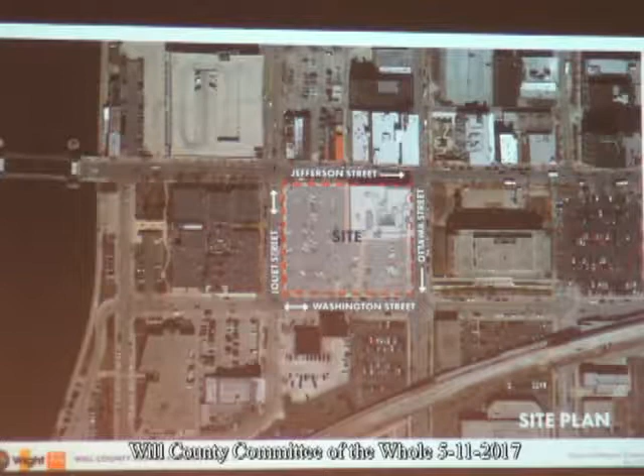So first, I think everybody knows the location. The county acquired the First Midwest Bank site several years ago now, and that's the site for the new Justice Center directly west of the current courthouse, the block highlighted there. And the project is intended to consume the entire block.

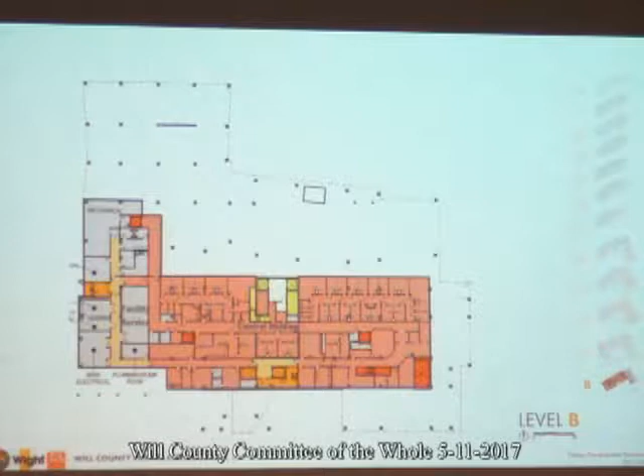I'm going to run through floor by floor to give you a feel for what's in there, the major overriding parameters. The project, as it's planned right now, is going to have 28 courtrooms in the initial build-out, and we'll talk a little bit more about this option of shelf floors. But the building has the potential to have 38 courtrooms total. The building is just under 370,000 square feet total, 10 stories with a penthouse for mechanical.

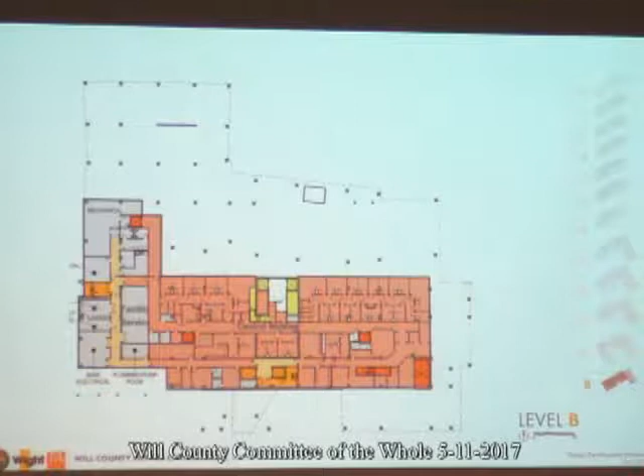The basement of the building is planned for the central holding functions. Folks that are brought over from the jail are held in central holding and then distributed to the upper floors for court. Also in the lower level, we've got some building support functions, mechanical spaces, and so forth.

On the first floor, this is one of those spaces where everybody was jockeying for position. The biggest components are obviously our security queuing. That's been a major component of the design discussions throughout the entire process. One of the significant challenges of the current courthouse has been the ability to process people quickly through security and have adequate space for people to queue and wait. So that's been a big focus. That's this area right here. We're focusing a lot of area for security queuing and security screening.

Also on the first floor, we're trying to accommodate most of our higher volume functions. So the traffic court on the first floor, that's a high volume courtroom. We have the circuit clerk's customer service functions. Oftentimes people will come in and just take care of business with the clerk and then leave, so we want that to be easy for folks coming and going from the building.

And then jury commission, jury assembly. That's another area that right now is challenging in the current courthouse. These are people that are donating their time to be part of the jury, so we're trying to make that a little bit nicer space. Because it's not utilized all the time for jurors, we're trying to make it multi-purpose so it can be used for additional meeting space to get the best value out of every square foot of the building.

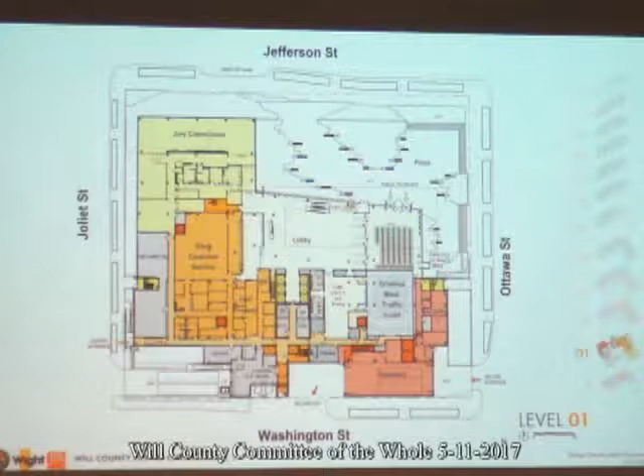The backside of the building along Washington has a lot of the service components, so that's where the sally port is for prisoner transport, loading docks, trash, all those kinds of things are oriented toward the south face of the building. And then we have a secured plaza at the front to make a nicer entry for folks coming to the building.

Second floor, again, we're looking at higher volume, higher used spaces. To get the vertical throughput in the building, we have elevators, but we also have escalators to the second and third floor to move people more efficiently, so you don't have those bottlenecks on the first floor. Two higher volume courts here, a criminal misdemeanor court and a small claims court. Both have a lot of people in them every day.

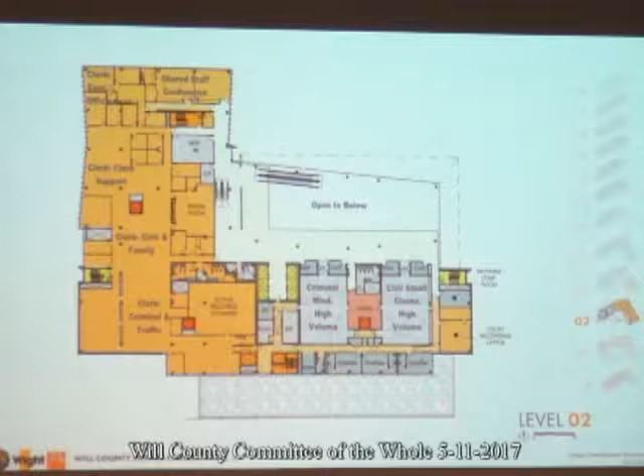And then the balance of the clerk space is on the second floor. There's a connection between the first floor customer service functions of the clerk and the back office functions, all the minute clerks and supportive functions, on the second floor, so they've got a direct connection of their staff for efficiency. And then you start to see supportive things, chambers, court reporters and other functions that make up the back wing of the building there.

As we get to the third floor, the main tower part of the building, the 10-story part, becomes more consistent in terms of the floor plan. We have 4 courts on this floor, and this wing we have been referring to as the agency wing. This tends to be much more office-oriented, so we have some satellite space for adult probation, law library space, and some satellite state's attorney space.

A lot of you will recall that in master planning we looked at options to consolidate every court function in the building, but it became too large a building. So state's attorney, public defender, and probation still reside with their primary offices in other buildings, but we accommodated a staging or touchdown space for them, so that if they are done with court and need to take care of a little business, rather than the state's attorney walking back to the EMCO building, they can do it quickly without leaving the building.

One of the other major things in the design: right now, in the current courthouse, there's not a good separation between the public, private staff areas. That was made better in recent years. And then detention, or the secure detainee movement, custodies. That is difficult right now. That happens kind of through the back judges' corridors, which is not an ideal scenario.

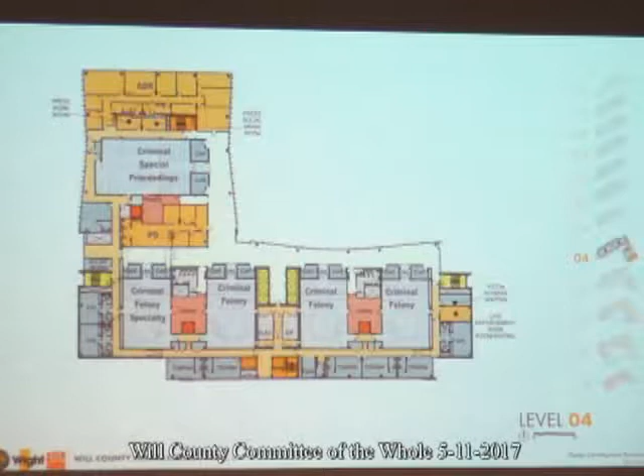Okay, so moving up to the 4th floor, we have again 4 courts planned here. A lot of the back corridor functions are judges' chambers and other supportive functions, and then we have jury spaces on the wings here. The idea with moving them out to the wings is, again, we're trying to get the best use out of every square foot of the building. So if a jury's not in session, then those spaces can be flexed to be used for other types of meetings. We have a secured point here and then another one back here, so that you can bring public in there to do a different type of function. So those are all the details we've been working out with the judges and sheriff's officers to work out the logistics on it.

This court here is one of the specialty courts, criminal special proceedings court. So that's a larger court. That would be where you'd have some of your more significant trials and so forth, where you need more people, more counsel. The standard courtrooms are approximately 1,700 square feet. A lot of that is dictated by Illinois court standards and the accommodations that are needed in the well of the courtroom, the litigation area, and then providing a little bit more seating area so you don't have so many people waiting in the hallway for trials and cases. We also have a public defender satellite office, and then the alternative dispute resolution, which is currently in the EMCO building, is moving over to this building as well.

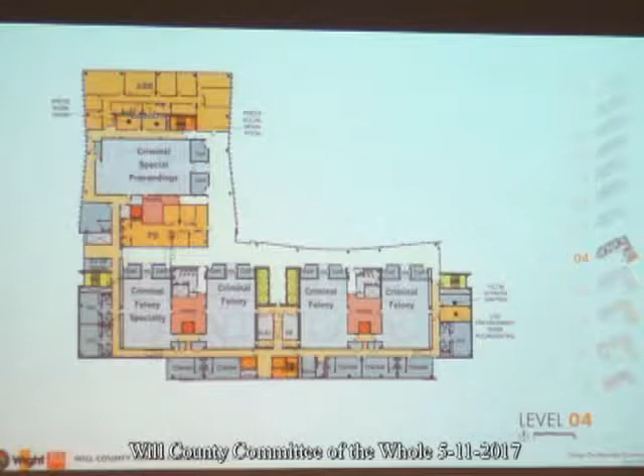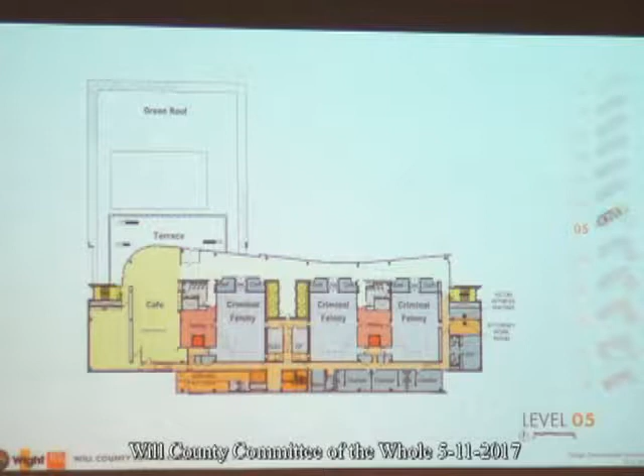6 and 7, we did a slight shift. Originally, we were looking at the project of having 24 courts in the initial build out, and going up to 34 courts, and that was staying consistent with 4 courts per floor. However, there was always a desire to try to maximize the number of courtrooms in the building and get the best efficiency out of it. So we did a lot of study with the judges and other participants, and we were able to accommodate on 6 and 7, 5 courts per floor.

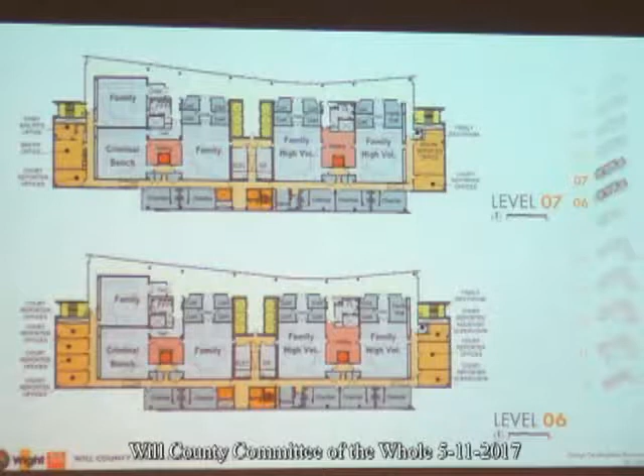So within the same total square footage of the building, we're able to get additional courtrooms, 2 more at the initial build out, and then as many as 4 total additional courtrooms if you go down to shelled court. So these are a lot of family courts on the floor, and then we've created a little bit different court, like a bench trial court, which doesn't require as much space. And that's kind of one of the strategies we use to maximize the footprint.

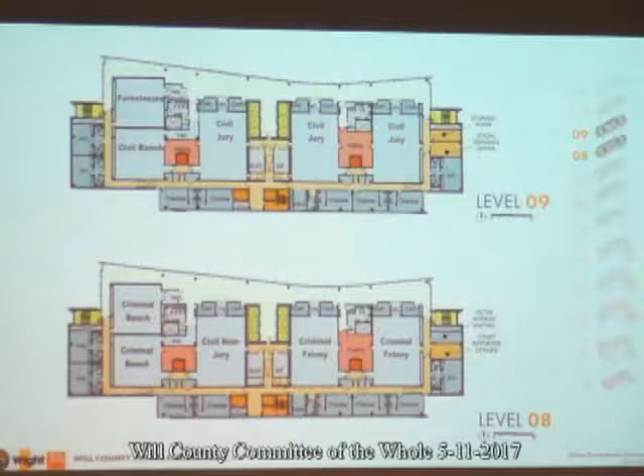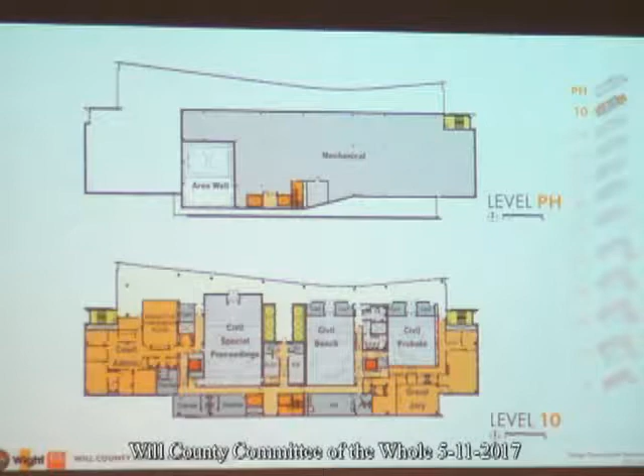The 10th floor, we have one more special proceedings court, so this would be a civil special proceedings court, again, the higher volume court cases. The court administrative areas are up here on the 10th floor, and then we have a couple other more specialty type courts, and then grand jury is also in this area. So grand jury is currently over at the EMCO building, will be moving to this building as well. And then penthouse is most of the mechanical systems and so forth for the building.

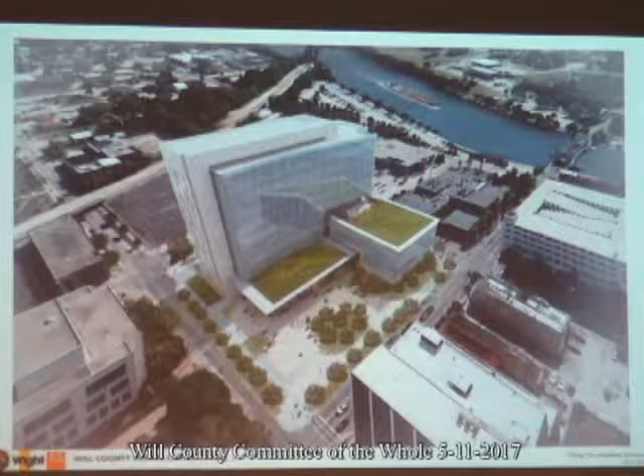So I'll just quickly go through a couple images. I think a lot of you have seen these before. This is just an aerial view of what we're looking at. It shows kind of the main tower section and the agency wing. We're calling this kind of the entry pavilion here. We're trying to pull security out from the base of the building to accommodate the extra square footage needed for the queuing and so forth.

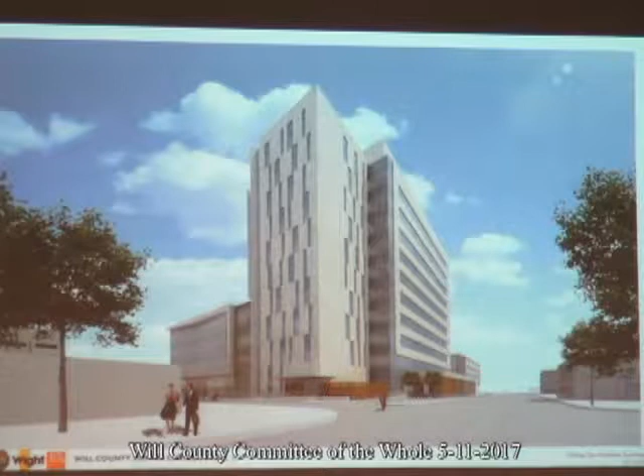This is looking at the southwest corner. One of the things that some of you may recall, we had a goal early on to try to accommodate underground parking in the building. Very challenging. We needed to accommodate secure detention down there, but there's rock issues in downtown Joliet, and that was one of the things we had to step away from. So we're looking at doing judges parking directly south across the street in a secured lot, and then we're creating a judges entry here, trying to clean it up a little bit so they're not walking past all the back of house pieces. This gives you kind of just a little view where the building is elevated also above grade.

Part of that was a strategy to avoid rock excavation and to provide a little bit more safety and security for the building, from anybody that might want to try to drive a car into it, for example. So we have stairs going up to a judge's back entry here.

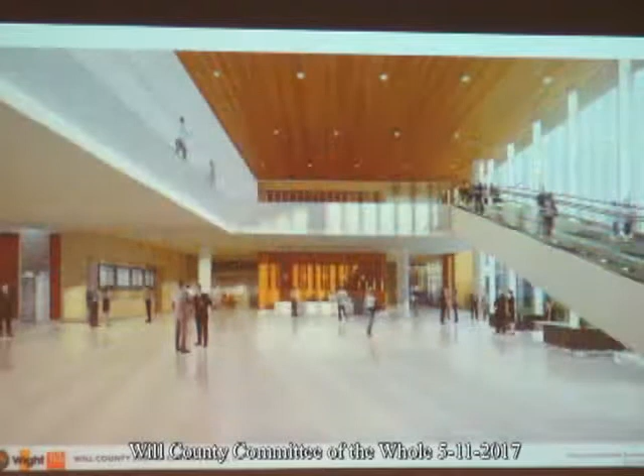This is a view of the main entry, so this would be just after you pass through security, information desk, this gets you over to the elevators, and then all the court's customer service functions are back in this area. And you can see the escalators going up to second floor, and then another set that kind of runs up this way going up to the third floor.

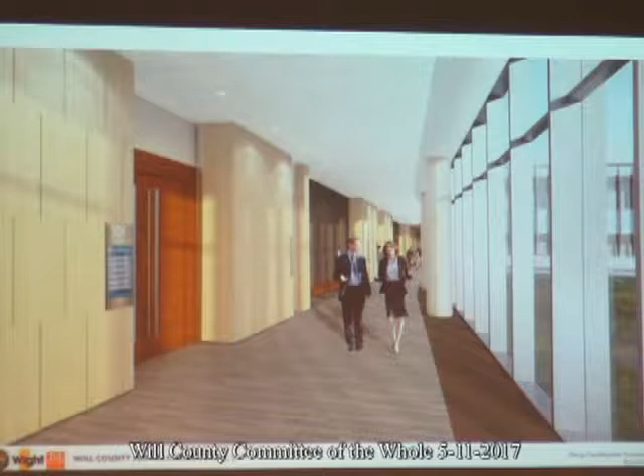This is a view of the main public corridor. I mentioned before about trying to have a lot of glass there. You know, if you've been in the courthouse right now, you know it's a little bit dungeon-like in the sense that you've got courts on both sides and there's no windows and just a little more challenging environment. So this opens it up a little bit, makes it a little bit more hospitable place. You can see entries to each of the courtrooms there.

We did a lot of work. Some of you may recall we did court bench mock-ups to really test out scenarios for the court bench. We had a lot of the court participants, their judges, clerks, everybody that would be part of the operation to refine that design. We're going to a corner bench to be as efficient as we can with the size of the courtroom.

Courtrooms are designed to accommodate for jury or non-jury. I think jury trials have been a little less common lately, but that can change at any time. So there's good flexibility to where if years down the road there tends to be more jury trials, you can easily add a jury box to some of the rooms that don't have them and continue on without a major renovation to the space. So again, with this notion of flexibility.

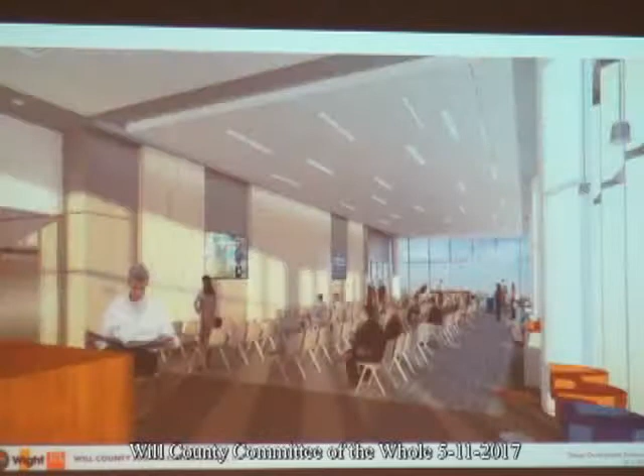This is the jury assembly area, with again the idea of, on days where you're bringing a jury in, you have plenty of space to accommodate jurors in a little more comfortable environment. But then if you don't have a jury, these spaces can be converted to be used for additional meeting spaces. This is one of the primary areas, and then kind of around the corner to the back here, there's another area for jurors that is perfect for a switch over to a large meeting space or training space for folks in the building.

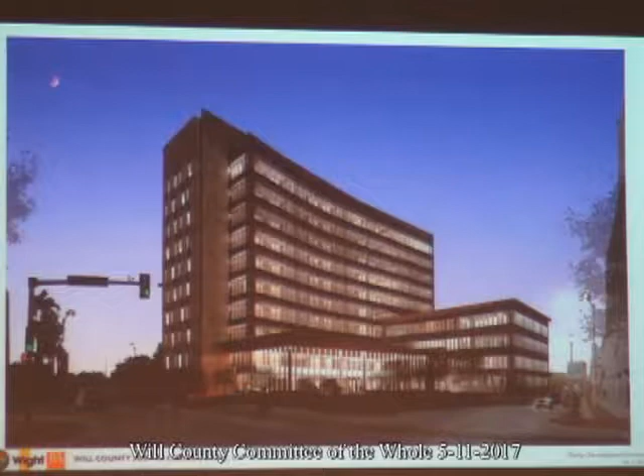So I mentioned before, as Jim said, what can we accomplish within the initial budget target of $195 million? And the team as a whole, all the users have been fantastic. You always start out with the wish list of items you want, but everybody's done a really good job of being practical, working hard to figure out, is this a want or a need? And we focused on the needs.

We are trying to prioritize things that have a good life cycle benefit. So as we looked at areas where we were having some budget challenges, we tried to stay away from things like mechanical systems, because decisions on that are hard to come back from. You'll pay a penalty long term if you shortchange your mechanical systems on the front end. But as we looked at everything we wanted, even with all that hard work, there were certain items where we said, well, if we need to get all the way back to budget.

Jason, maybe I can stop just for a second, so you'll understand the process you went through. After the first initial round, where you're including a lot of what the users would like to have in the building, I think we did have a budget that was about 215. Yeah, so we were at 215. So the team then had to say, we're $20 million over the target of 195 million. Now where can we start trimming this down and talking to the users, to see what they really need and what's absolutely necessary.

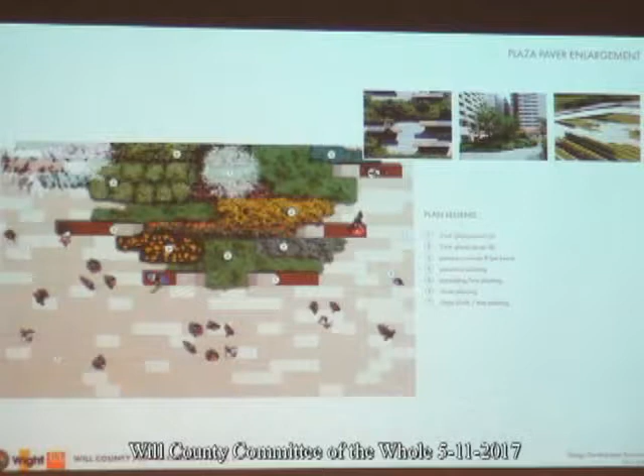One of them has to do with the plaza. We're proposing a precast concrete paver plaza as opposed to just a poured concrete plaza. This again, I think, is going to help with long-term durability. When you have a concrete plaza, I think I might have a couple images here, you can see even at your own courthouse what happens over time. It gets cracked, it gets beat up, you have to replace it, it doesn't look right. And these can also become trip hazards and so forth.

If you go with more of a precast paver on top of the concrete, it's much longer lasting. If there is one that gets cracked, it's a matter of just replacing one and not having to re-pour a whole section of the plaza. So this is another item that we're recommending be included.

The next has to do with, this is a little bit more of an aesthetic issue. You saw the images I had before. We have a wood ceiling, something that kind of livens up the space. We're trying to be smart about where money is spent. The offices are just pretty simple, straightforward, plain offices, right? That's just more about getting the work done. There's a couple areas, though, where we're trying to make it a little bit richer building, make it a little bit more warm feel as you enter.

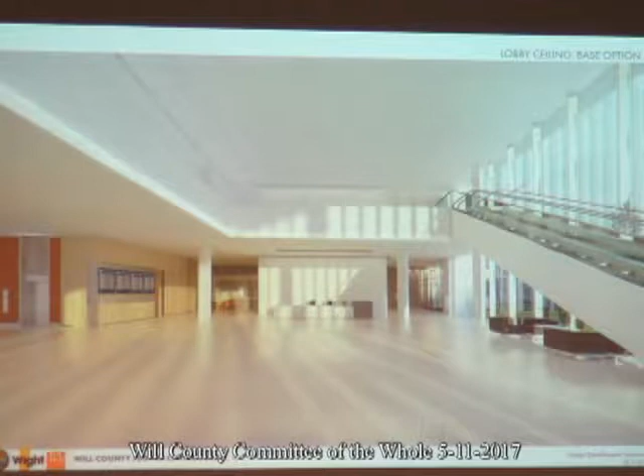So one of the options is to go with just a plain painted gypsum ceiling. That was one of the things that we kind of had to do to get all the way back to budget, but you can see the difference between that and this. If you add a little bit of wood into the space to make it a little richer, a little more warm and comforting environment, not so sterile.

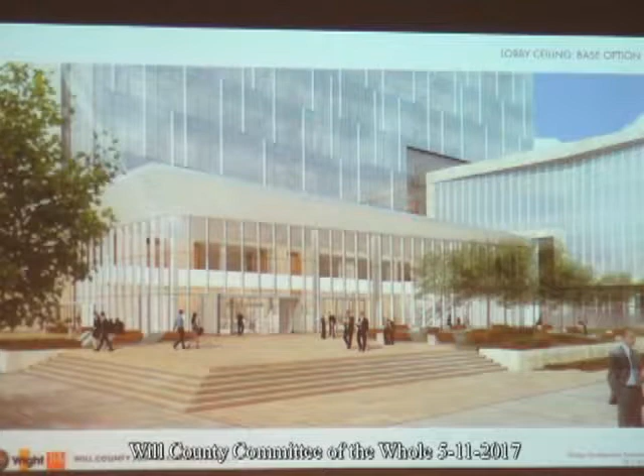Where it really has an impact, though, that ceiling extends out, so you can see that it comes out in the overhang, and we have to get into more of an exterior plaster system. So it just gives a very different look to the building here than in this image. So this is another one of the items we're proposing.

Looking back, we have an element here. We call it a canopy, interior canopy over the security screening. Right now that's accommodating lighting for the security work that's being done, cameras, a lot of infrastructure. We've got digital signage that's part of that. But we looked at it and said, well, do we have to take that out of the budget, or out of the project? So it kind of gives you this look here, we lose that.

We do have challenges with that in terms of how do we deal with the wayfinding signage. That's a big deal in terms of getting people in and oriented and knowing where to go. So there's another one we recommend adding back into the project, just to accommodate some of that infrastructure.

I think I skipped over the flooring. We had a base system here of a tile floor. But one of the things we've talked a lot about is just in the main public lobby, which gets the most traffic, going to a terrazzo floor there. Anybody who's seen, even in this building, terrazzo can last forever if it's done well. Tile's a decent product.

The only issue is you still have grout joints, and anybody in their home who's got tile knows that over time the grout joints can get dirty, hard to maintain, and so forth. So we're recommending moving to a terrazzo solution, which will have a better long-term durability.

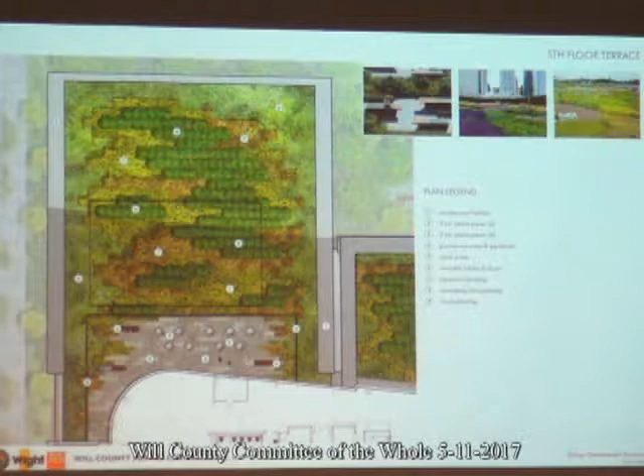We met with this potential food service operator that would be in the building. They saw this as a benefit. I think the more you can make it a good space, it makes that food service operation more viable for people that are in the building. The objective is to not have a county-run food service operation. So the more you can keep people there buying product there, the better it is for the operator to be self-sustaining. So this also adds to that, in addition to just giving a space for people to step outside without having to go through security.

Another one is in the courtrooms. I mentioned before that in the office areas it's a little bit simpler finished material, but we're trying to be respectful to the work that's done in the courtrooms, a little bit more dignified. So this is kind of a minor item, but we looked at options to just do more painted drywall, which just has a little bit more sterile look to it, versus adding a little bit of wood into it.

So not a big cost item, but something that I think just ties the overall design together a little bit better. It makes it a better finished product. There's just a couple more views of that and the differences.

So that's the bulk of the smaller items that we've talked about, and items that we feel pretty strongly are going to provide good payback for you, and make it an investment that the county's proud of overall. So that's those key items. Did you want me to jump into?

I talked a lot before about how in the base concept we've only got 28 courtrooms planned, but if we build the extra 2 floors, we can take it up to 38 courtrooms. So same kind of concept where we're doing 5 courtrooms per floor. As we project it out, we know that there's going to be a need for those courtrooms, maybe even sooner rather than later.

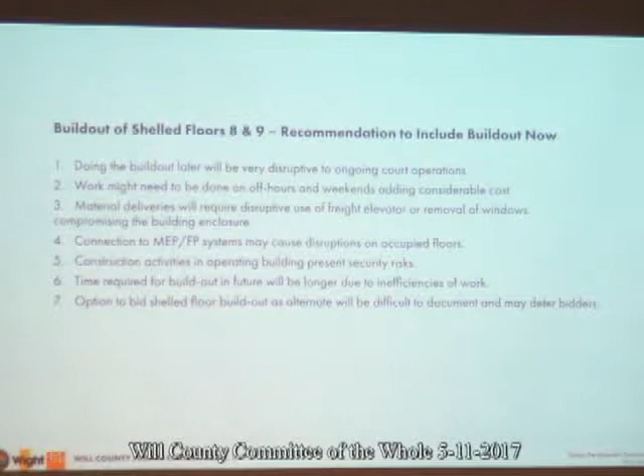But doing the courtroom build out after the building's occupied is going to require the work to be done either on second shift or overtime on weekends, which is obviously much more expensive, and it's going to cost quite a bit more to do it then than it would now. We took a look at some of the other items too.

All of the stocking of the floors, which you would normally do now during construction, you would do with a window leave out so that you can get drywall and other materials up onto the floors. Doing it later, after the building's occupied, you're going to have to do it with a freight elevator, which is much less efficient. You're not going to be able to put as much weight on that. It's going to require doing this in a much less efficient manner.

And typically when we see tenant work done in buildings that have already been completed, in the base bid you put a premium in there for any dings and dents that you're going to cause to the lobby, to the flooring, to the walls around the elevators.

Obviously the elevators get pads and you can protect the inside walls fairly well, but there is a chance that you're going to damage some of the existing finishes, floors, lobbies, lobby walls, doing it after the base building is done. We'll have to connect to existing MEP, fire protection systems, and security systems when we build out 8 and 9 at a later date.

That could cause disruption, the cut-ins, the tie-ins. Some of the systems may be down during the tie-in parts of the construction, so that can also be disruptive to the entire building when we do this at a later date. It probably has to be done on weekends, cutovers and tie-ins, and that obviously just costs more money to doing it at that point in time too.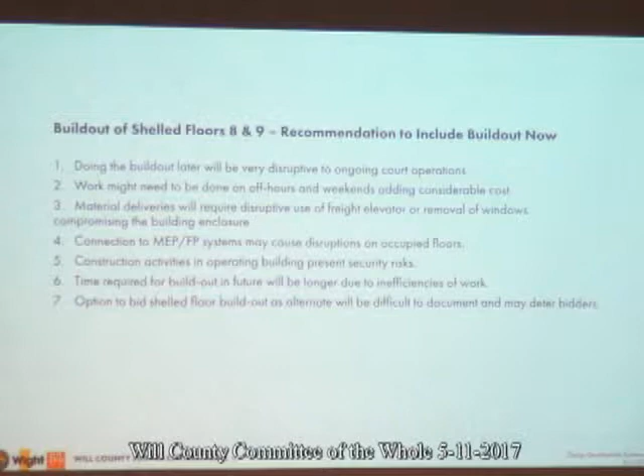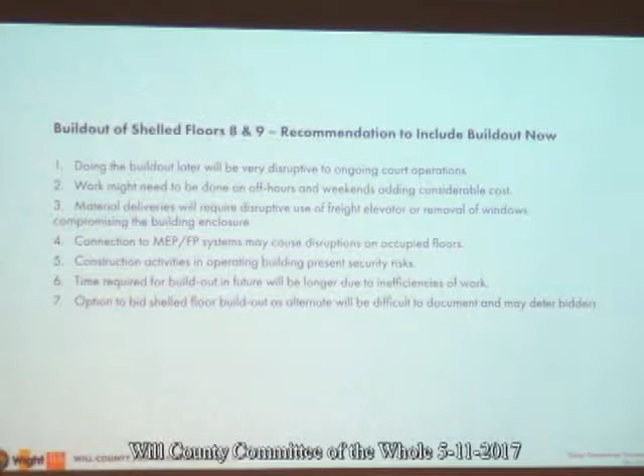So that can also work against us and can impact the number of bidders that we have for certain bid packages, because the build out and the alternates will affect pretty much every trade that we've got working on the building. The numbers that I said we'd get to here: right now, our cost to build out one of the floors at 8 or 9 is $9.2 million. That includes FF&E, that's a total build-out.

Looking at this going forward, we kind of just took a 5-year time frame to build this out after the building was occupied. Looking at about 4% a year material and labor escalation for the next 5 years, we'll probably see about 1.8 million in escalation, additional cost for that labor and material. Labor, the unions will continue to have their increases on May 31st, June 1, whatever, so labor will continue to rise somewhat predictably, it's a given that that's what's going to happen.

Material prices have been fairly unstable at this point in time. We look at differences in conduit, in pipe, and steel. Steel has gone up, gone down. It's kind of on the rise again. We're hoping that when we bid this out in September, we're going to be where we think we're going to be right now in the estimate. But the mechanical guys have been telling us, the contractors and especially suppliers for things like pipe and conduit, that it's been fairly unpredictable, and those prices have been fluctuating

fairly wildly lately. And then added cost, the penalty, that 15% you see there, the 1.3 million, almost 1.4, is what contractors will look at for the things we talked about on the previous slide: access, second shift work, inefficiencies, not being able to get the production they would get if they built it out with the rest of the building. So we figure that the premium to do this, say 5 years down the road, might be about $3.2 million. So what is today about a $9.2 million build out for each floor could translate into somewhere around $12.5 million in the next 5 years if we waited that long.

And what I'm really wondering is, did we meet the needs of the people who are in the family court and what they say they need? Or was that part of the cuts that were made in order to come in under budget? Yeah, if you pull up level 6, I think that answers your question. Okay. All those conference rooms where it says family high volume, is that what you're referring to? Where the children can meet in those rooms? Yeah.

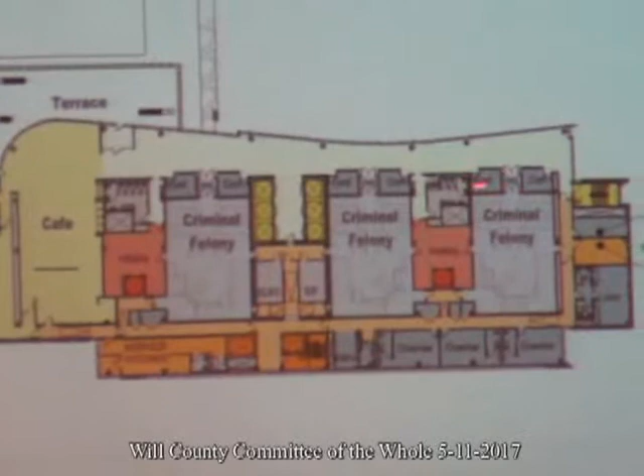Quick answer to the question is, we were able to meet all the required program elements for the family courts. Even though we added the 5th court here, this is intended to be slightly different, a criminal bench, but you can see the difference. I'll just go down one. On these, you've got 2 conferencing spaces outside of the courtroom. On the family floor, we've got 4. A lot of this is about providing separations of the different participants. We also have more specialty space over here, which would be like a family waiting. So all those program elements that we discussed in the planning have been addressed in the floor.

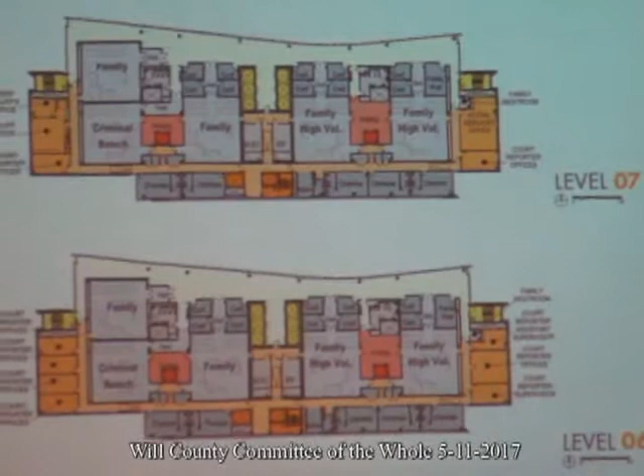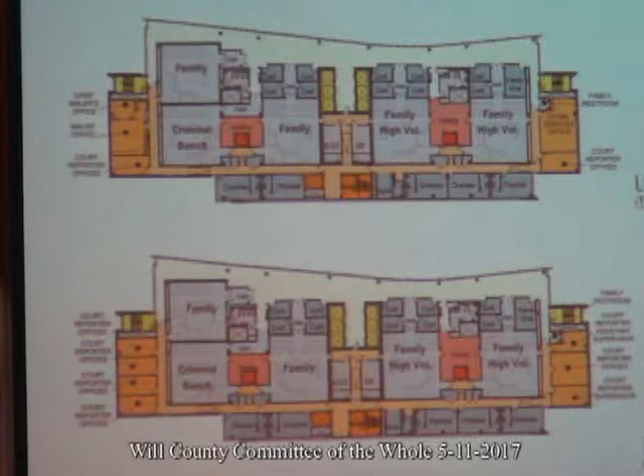Okay, and that family waiting isn't specific to the one courtroom, it's a family waiting for the whole floor of people who are using that. Right. What we're trying to provide is a variety of spaces. Any one of these could be used for a waiting space as well, because they don't all need to be used for conferencing, but the idea is to provide enough separated spaces to keep different parties separated, children, 2 spouses that are having a difficult time. So the idea is to provide a lot of flexible space to accommodate those functions on the floor. Okay, that fully answers my question. I was just hoping we didn't cut from what they needed for their unique needs. No changes to the needs there.

I just want to plant the thought in anyone's mind who may agree with me. On number 8, I actually like the photo with the white ceilings better than the wood, and that would save us like $400,000. So I just want to put it out there in case anyone happens to agree. I also don't think number 3 is that big of a deal down the road. Give somebody some union work to do, but I think those are my only 2 that I have a reservation on.

I think Mike kind of answered my question. I am fine with keeping these 2.28 million, whatever it is, 800,000 in the plan. And if we don't build out floors 8 and 9, I don't see the purpose of ever even building this courthouse. And if we're not adding courtrooms, there isn't a purpose. We're just spending $195 million to replace the building, and that's nice, but if we're not adding courtrooms, it doesn't make any sense.

We are adding courtrooms with the new building. We only have 31. I didn't understand that from the way the judge spoke, but maybe semantics somewhere along the line. Sarah? Jim, I think the chief judge wanted to address that. Oh, just I don't think we're...

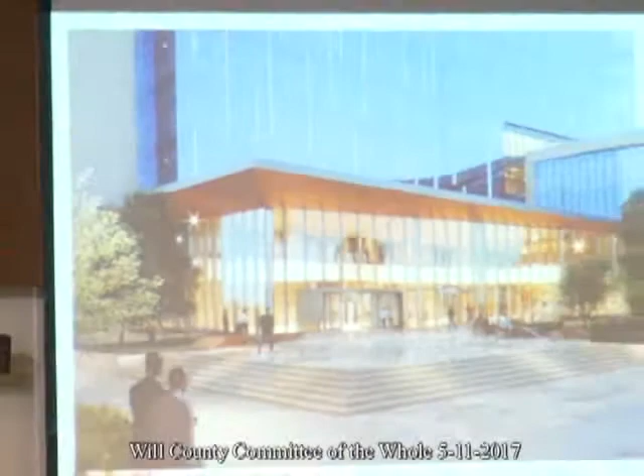And we felt we did a really good job delivering $195.5 million with the rain screen, the project. One of the things we did not want to do is we didn't want to cut any functionality out of that $195 million. We wanted to make sure we delivered a functional building to the chief judge and all the judges. So with that being said, I felt it was very important that we talked to everybody as a whole, and so did Jim. We brought it forward. You've seen the options that we have before us.

We're in a very unique period of time when we decided last year to go out for a major bonding loan for the whole 175. At that time, there was an extremely favorable market. Like we explained, we got an additional $30 million, almost of free money. It's $30 million that you could have towards building in functionality for the future. My personal belief is that we accept these 8 changes, and we build the 2 floors all at the same time. I'll look forward to talking to Ms. Winfrey further about her idea.

I think there's going to be some design changes because basically from the design programming, we were basically copy-paste a couple of the floors. Now, obviously, there may be some challenges, and I'll talk with Jason further about that. But if any of you have any questions or anything that you'd like to submit to me, I will absolutely carry them to the committee, and we'll discuss them there. And I think we'll come back probably for a full vote, right?

Oh, yeah, we'll bring it back to the full board on the recommendation of the Capital committee. They'll come back in resolution form. It'll be more a yes or no by the full board. That's why it's important if you'd like to have some additional input to get it to the capital committee. That'll be their first meeting, the first Tuesday in June, as we discussed. Not at the next meeting. So that gives everybody additional time, nobody feels rushed.